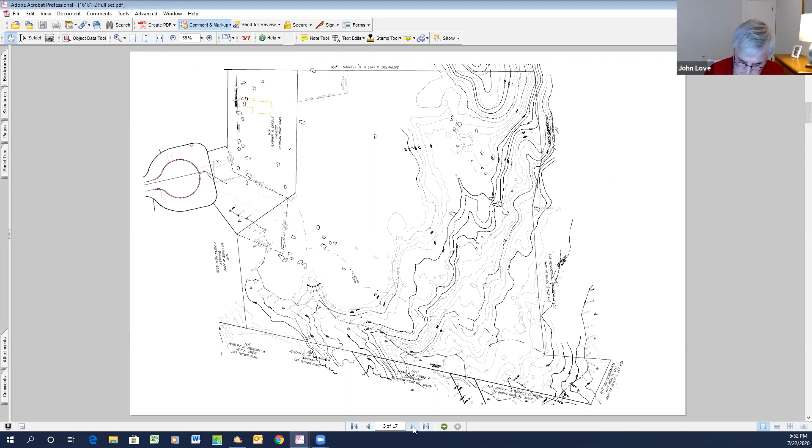Lots 14 and 15 will be the duplex style houses. All the rest will be single families. Okay, thank you.

Okay, question 3 here—I think we had a comment that two-family duplex homes are proposed on lots 14 and 15, and it's unclear if they will have garages. We haven't seen the plan. So you said we'll see those plans, correct, and that will answer it. Do you happen to know whether they do also have garages? Yes, they will have garages.

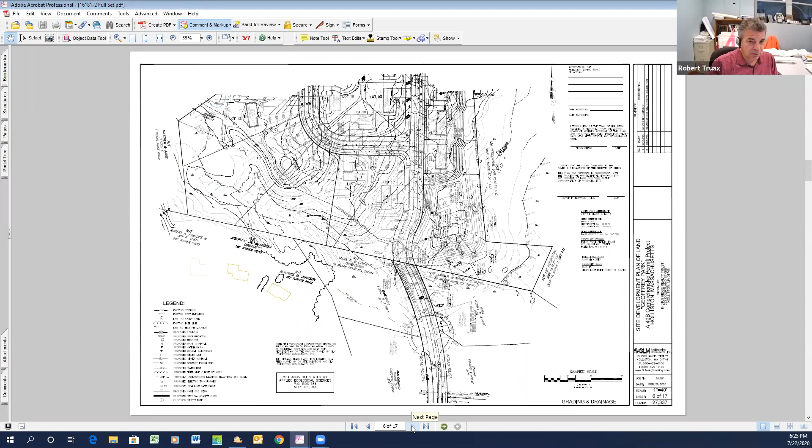I'm sorry, the limit of length to the cul-de-sac? The limit from the subdivision regs is 500 feet from an intersecting street, and I believe Indian Ridge South is well beyond that already. I think it's, I can't recall, maybe someone could correct me, but I thought it was like 600 or 700 feet in length. Okay, all right.

Roadway geometry, handicap ramps. There's a comment there of looking for more detail on the plan regarding handicap and grading.

There was a comment considering extension of the sidewalk to the proposed limit of construction through the existing cul-de-sac, since you're doing work there, to carry the sidewalk basically as far as practical. Does anyone have any comment regarding that?

The way the plan shows it, the sidewalk would terminate at the driveway for the last house on Indian Ridge. So it extends to their driveway. We could bring it past their driveway to the cul-de-sac and put a handicap ramp right there. I don't see an issue with that.

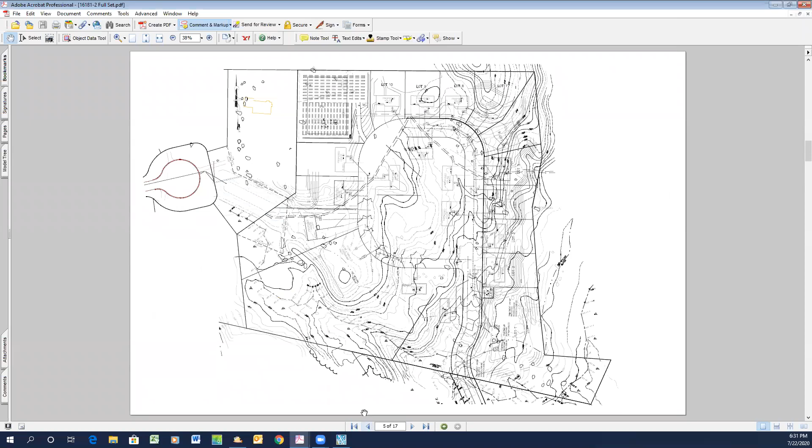Sure. So the drainage system is obviously in the street — we have catch basins, manholes, culverts, etc. that will convey the water to, if you remember in the beginning of my presentation, we talked about lot 1 being the drainage basin. So lot 1 has a large basin that's going to retain the water during storm events and then release it down towards the wetlands as the storm dissipates. So lot 1 is the drainage basin.

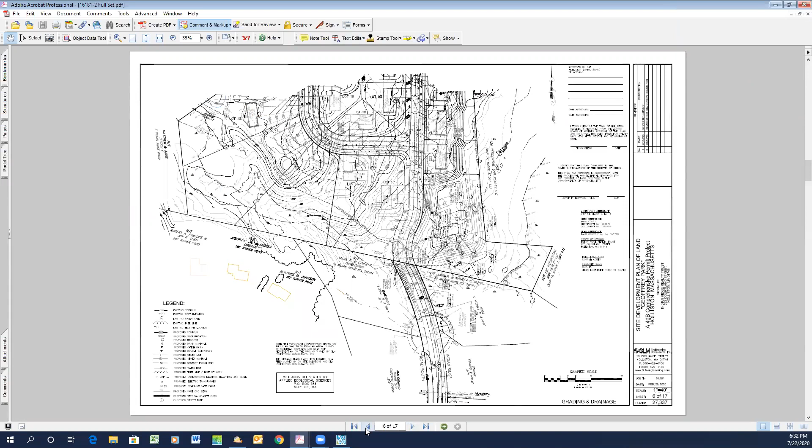Let's see if I have a better look at that. So when you say large basin, are we talking about one of those concrete things with holes in it, or is it like a swale, like one of those landscaped ditches? Yeah, it's an open basin like a pond that'll be grassed and mowed and maintained. Okay, and again, that would be the homeowners association's responsibility? Correct.

Okay, that's all I had. Thank you. Okay, thanks. Megan, a question?

Yeah, I just had another quick question. You said there are 2 sites that have a similar leaching field system set up. My question is, those 2 sites are both 55-plus developments, and they use far less water than a development aimed towards families with 3 to 4 bedrooms. That's kind of not comparing apples to apples. Is there another place nearby with the same setup, but for something using a significantly larger amount of water? I know that once my 4-year-old was potty trained, we used a lot more water, and we wind up pumping our septic more often. And that's just adding one.

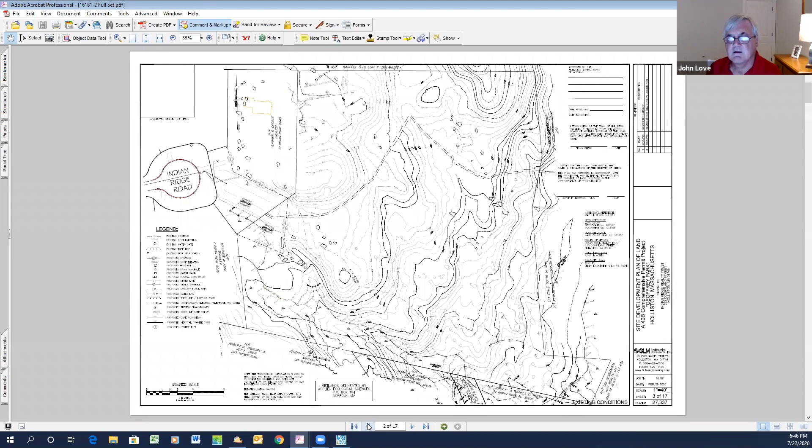Number 18, Rob talks about the abandonment of the easement on the northwest corner. Is there anything that will be done to document that, or just continue? I can ask the owner, the applicant, to provide something on that. Okay, we might as well cross the t's and dot the i's on that.

19, existing easements are not labeled. That's been done. The 20-foot wide easement should be labeled on sheet 7 of 17. All right, that's a note. So you've seen that note. That's housekeeping, you have to bring it back. I'm sorry, I went through all the questions and I missed that.

We've been through, I read through all the comments and I didn't see anything that we wouldn't be amenable to. But go ahead and go through them, and if you have questions on any of them, I'll see if I can answer them. Yeah, I'm just scrolling through to make sure we don't miss anything, but I did see a question.

Yep, Donna has her hand raised. I apologize, I just saw it. You may need to unmute yourself. We're not hearing you. That is my signature move.

Hi, this is Donica Howeisen at 6 Indian Ridge Road. In the context of the discussion about the street trees and adding trees, with there being no landscaping plan, the original comprehensive permit application stated that the applicant intends to preserve mature trees and native vegetation, which will allow for over 50% of the site to remain in its natural state. Is that still the plan?

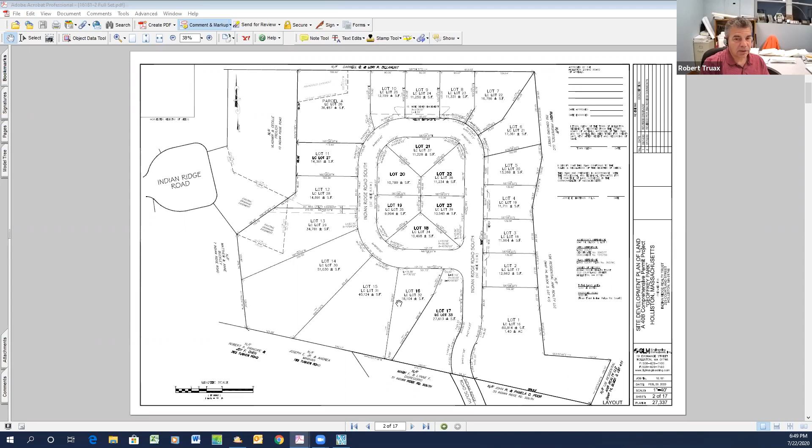So if you look at this, I'm trying to give you a sheet to look at. The biggest area that'll be natural forest is along the backs of lots 13 through 17. If you look at this line right here, this area is the biggest area that will remain natural in its current state.

If you remember, when we walked along the ridge during the site walk, this was where the ridge was. We were saying that was the limit of clearing, so all this forested area was going to stay, and the abutters along there were on the walk and were happy to hear that.

So it's more like—I believe it's more like 20 to 25% that remains in its natural state, because there's some area down in the backs around these houses, but this was probably the largest piece, right here. That really is along the abutting properties on the Holliston side.

And is it safe to assume, Rob, that with the exception of those corners you mentioned in the back, everything from that line up to at least the backs of the other lots would remain undisturbed? Yeah, and that would be just a little—it's probably 2.25 to 2.5 acres. Okay.

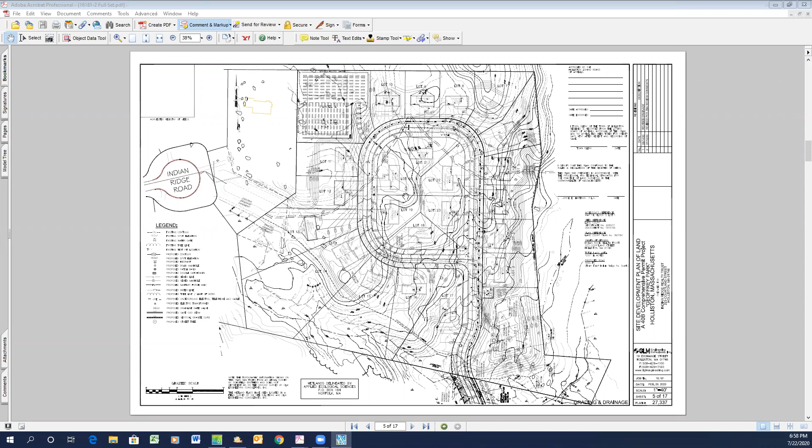Okay, I think we'll be able to pop through some of these quickly because a lot of them have already been done. Easements we talked about, water department we talked about. Parking. Sewer force main we got - that's number 30, 31, 34.

Then the next few have to do with the roadway design and traffic, and I think let's deal with those when we have the traffic engineer on here.

Wetlands crossing, cross-section and retaining wall details are not provided - that's number 41 here - and there's a recommendation of a steel guardrail fencing. Any comment to that? No, that, we're fine with that. We'll put a guardrail.

The next one goes into the Conservation Commission filing, so that will follow up through that. I think likewise with the wetlands replication area grading and the order of conditions relative to that.

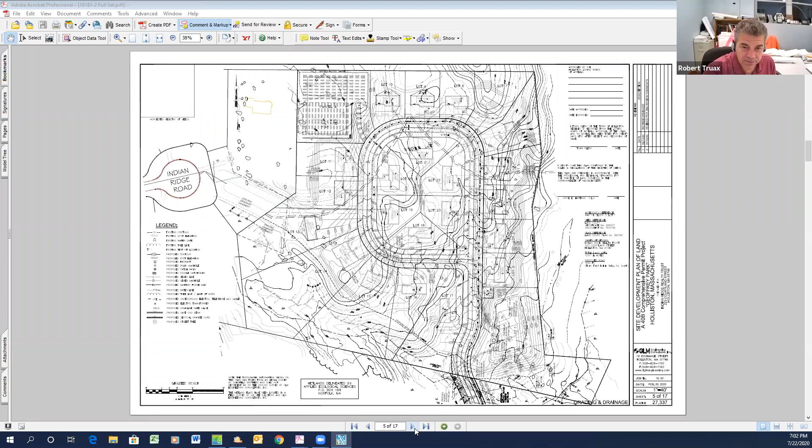So 48 is just about the double-grated catch basins. I think he's just asking - and correct me if I'm wrong, David - he's just looking for those to be shown on the plan. Oh, I see, that is what they are. I misunderstood that. Gotcha. But then the other one he's talking about, let's see if I can show you.

You can't show it on that screen. I probably can on a different screen, let me pull up a different screen for you to look at. Hold on, I should have done that earlier. I'm trying to slide this screen - tell me if the screen changes. Did you guys just get a new screen? Yep, yeah, there it comes. Perfect.

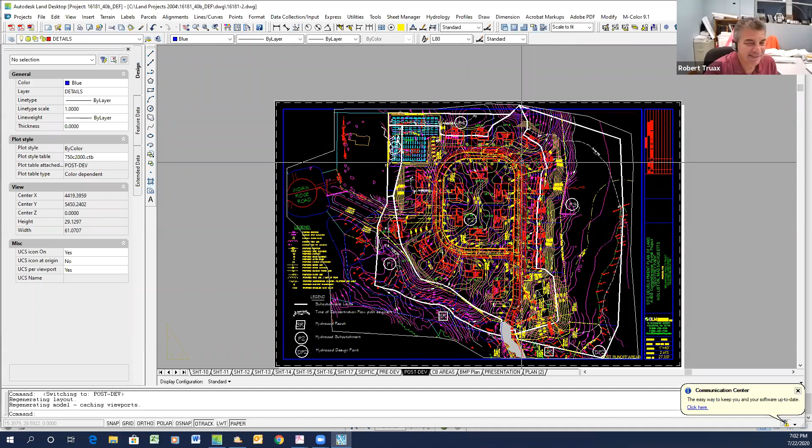So what he's talking about - I'm going to zoom in a little - is this area in the back right here, P4, see where the P4 is? So there's a low spot right here on the back of these lots, and there's a small amount of flow that's going to contribute to that previously undeveloped area, because these houses are going to block it from coming out into the street, and then it just sits there. It's a very small area.

I believe, David, what I was showing was a slight increase in stormwater flowing into that area, and that's what he's asking about maybe. I did put infiltration on these two houses for the roof on the back side - I did not take those out of the equation, so they're still there, but I did show some infiltration to help mitigate that on these two houses. I believe I listed it on the detail sheet that those two houses will have infiltration, as well as the ones asked for on the downhill side.

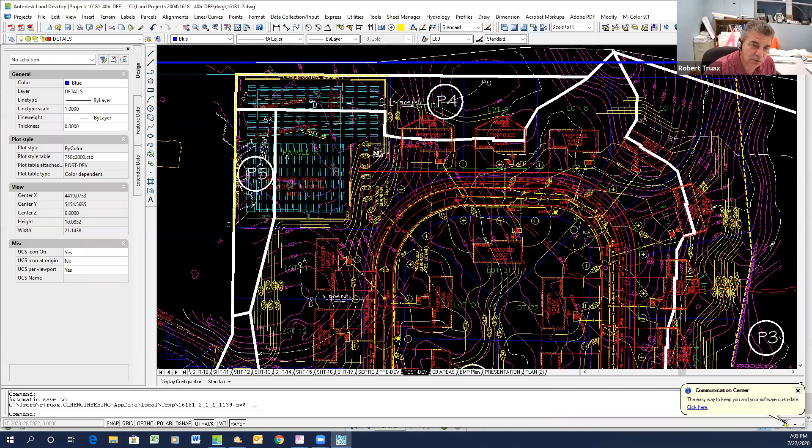And then this other area just flows down towards this little P5. This water comes down into this swale here and comes down into this drainage basin. This is just a small sliver of land on the back side of the hill that flows off the site.

And I think there was something in there. I don't remember the numbers, I don't have them open right now, but it was something around maybe 0.01 or 0.1 CFS or something.

Right, slight increase, David, if you recall. It's just one of those things, a minor increase, but still technically an increase. So if there's a way you can adjust the grading a little bit to get that to equal, to make sure there was no increase in runoff.

I think what we could do is where it says P5, that's part of the septic area. We could pitch that whole septic to the other side, coming across towards the street. So that whole back area we would get off, and that would help address her concerns about grading and runoff. So I have no issue doing that.

Okay, yeah, that makes sense. Thank you.

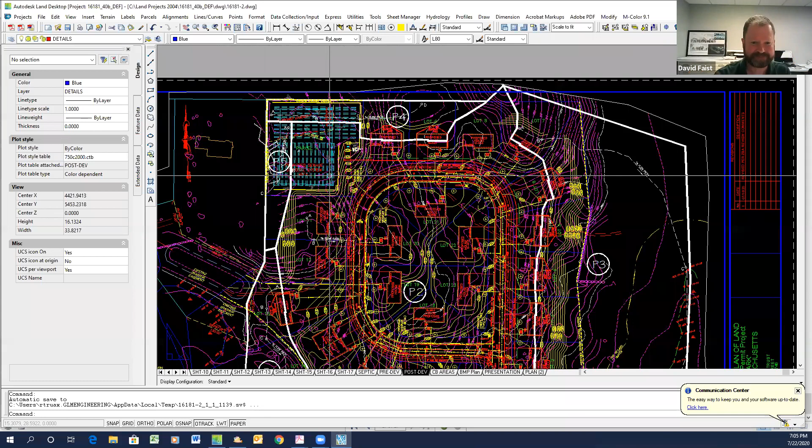I'm going to get rid of the screen, go back to the other one. You're getting better at the screen sharing.

Okay, I was looking through number 59 on drywells that has been addressed, and just recommended it be witnessed by Scott. High groundwater elevation separation.

Typo, I'll let you clean that up.

Number 71, which talks about submittal of NPDES verification and stormwater pollution prevention plan. Any concerns with that? No, we have to do that before we can start construction. Done. Yeah, you can condition that, it's usually a typical condition of approval on anything, subdivision, 40B, whatever, site plan.

That's a standard condition. Sorry, I've been looking at this and we've had some questions come up, so I may be getting ahead of those. Donica, please go ahead, sorry, I got too many screens open.

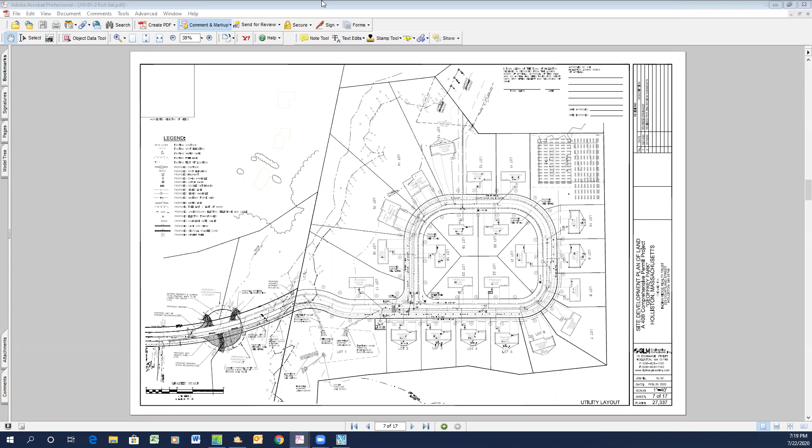Yeah, I think we'll do it, and that would typically go in as conditions for construction, what they can and can't do. But Rob, maybe that's just something to ask the applicant to be prepared to talk about in the future meeting - what the plans and what the anticipation is for blasting and other more obtrusive construction techniques.

Okay. Now, I think the next big concern that we want to address is the whole traffic issue. We've had a lot of conversation in our earlier meetings about the concepts. We've now gotten the report. We haven't had a chance to have it peer reviewed, which we want to do. We're in the process of bringing someone on to do it, and then I presume they'll need a couple weeks. So I think we need to talk about scheduling the next meeting regarding that.

So we're at the 22nd of July. If we have somebody going on this within the next week or two, give them a couple weeks to do it and use some time to respond, I think we're pushing ourselves to the end of August, beginning of September. So I would reach out to both the board members and the applicant to see if we can figure out a good day for a meeting to put that on the agenda.

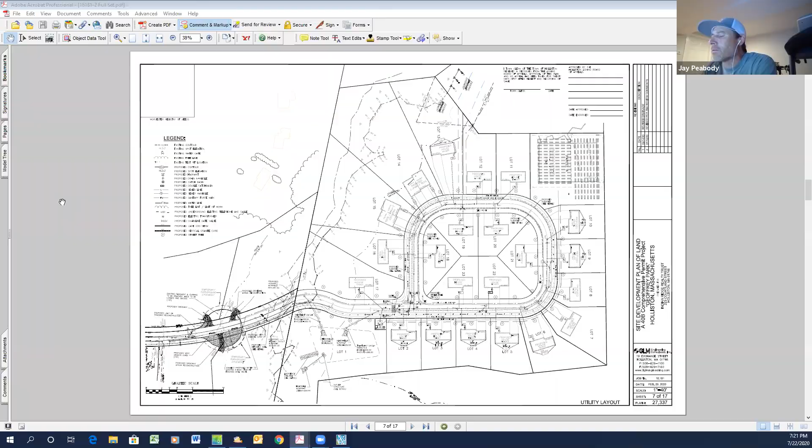What do we have? The end of August is the 26th. So we'd be either looking at the 26th of August, or I guess the 2nd of September, or the 9th.

This is Karen. Just a reminder that you had scheduled two other items for the 26th. I thought we scheduled those for the 12th. That's kind of where I was thinking as well. I didn't think it was that far out. Oh, maybe not.

This is Liz. It was the 26th because I couldn't do the 12th. Right, okay, that's right, it's in the minutes too. So the 26th is, we've already got at least one. Why don't we just do a separate meeting for this, maybe the following week? You guys okay with back-to-back meetings?